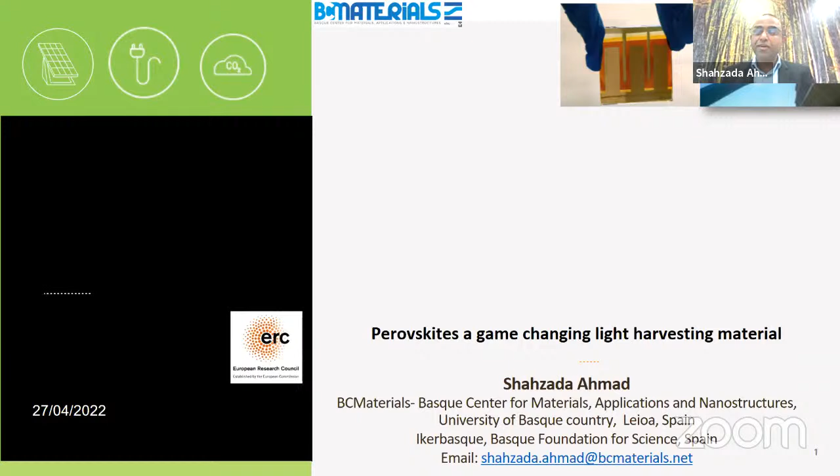Today, for almost the last 2 years, we are going through an unprecedented time. And we don't want to repeat this in terms of the climate crisis. Because if we do not act, there will be another disaster scenario in the coming 5 or 10 years. That's why Europe has targeted to be carbon neutral by 2050. And many new technologies will be entering the market.

And especially in the last 2 months, you know that we have been facing other problems in Europe with the electricity price going up. So we need to be self-dependent and self-reliant for security. So this is the outlook of my talk today. I will give you a flavor of thin film PV, perovskites as a light harvester, and how you place 2D materials inside as an interlayer. And then we talk about selective layers, N-type and P-type selective layers.

And this is not only a technology photovoltaics needs, because we are also educating the young generation, inspiring them to think about it, and we are connecting people. So with this emerging or thin film photovoltaic technology, apart from technology, we are addressing the most pressing challenges like the climate crisis, and we are educating the young generation.

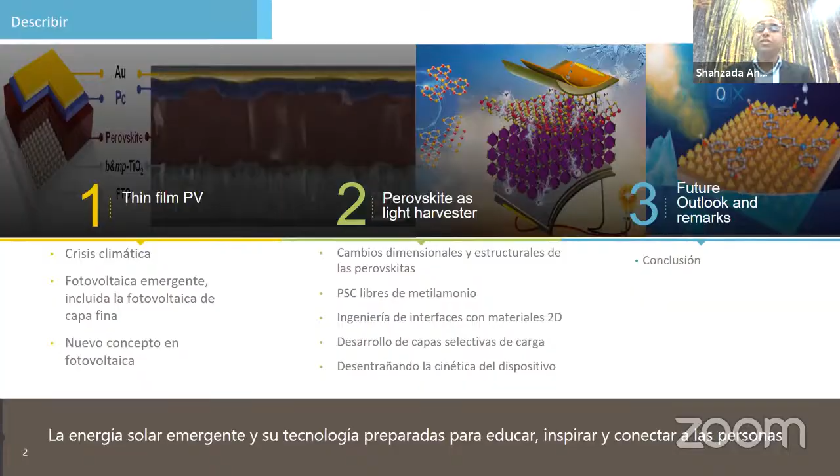Shell, a British company, in 2020 built up a Sky scenario. A Sky scenario because Europe wants to be carbon neutral by 2050, and some countries want to be carbon neutral before then, by 2040. So we need a scenario. We need to set milestones for how we are going to achieve it. In 2015, we signed the Paris Agreement, and we agreed that 2 degrees was too much, so we will cap it at 1.5 degrees centigrade.

And today we are here, 2022. Some cars are running on hydrogen, but by 2035, photovoltaics and wind will be our main source of energy. Almost 1/3 of the electricity will come from wind and solar. And slowly hydrogen will also enter the market. By doing so, Europe will be carbon neutral by 2040 to 2050, and by 2070 almost all of the planet will be carbon neutral.

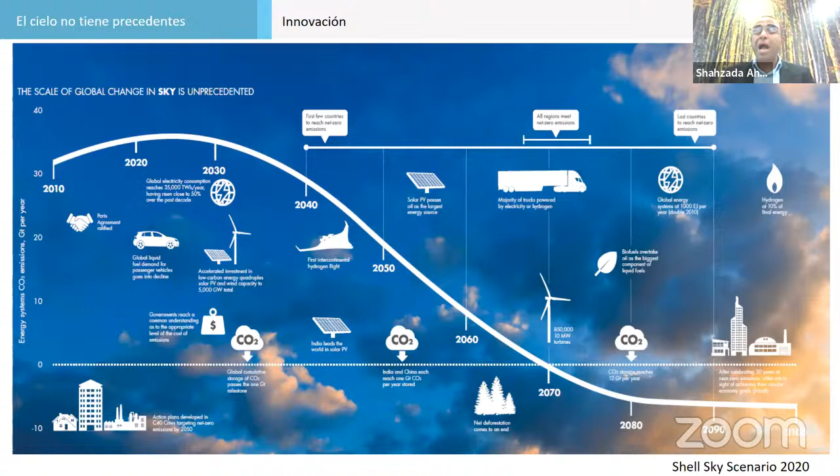And photovoltaics has a huge role to play. By 2050, most things will be done with photovoltaics, and hydrogen will be a new vector for long-haul trucks and buses. We are very happy with the photovoltaic deployment with silicon in the last 10 years, but we believe that is not optimum. We need 1,000 times more photovoltaic deployment to achieve carbon neutrality. So for this, we need new technology, new approaches, a paradigm shift.

As I told you, today solar is almost 3% to 5% here. By 2070, 32%, 1/3 of the electricity, will come from photovoltaics. You can see how this will happen in a gradual manner in this pie chart, for 2025, 2050, 2075 and 2100. So slowly the pie chart will change, and the market share of photovoltaics will increase.

So we are very happy today. The cost of silicon is very low. We are extremely fortunate that new installation of solar energy is now much cheaper than burning fossil fuels, and of course wind in some areas, because this is the best gift to humanity. The sun is always shining somewhere, and wind is also blowing somewhere. We just need an approach and technology to harvest it.

We believe that perovskite solar cells are targeted to capture the thin film market. Silicon is a fantastic product. We don't want to disturb it, let it be, but we want a parallel entry into the thin film market. There is CIGS technology, cadmium telluride, and now emerging solar cells like OPV and perovskites. Perovskite solar cells are the most competitive with cadmium telluride, because cadmium telluride has the lowest LCOE, levelized cost of electricity.

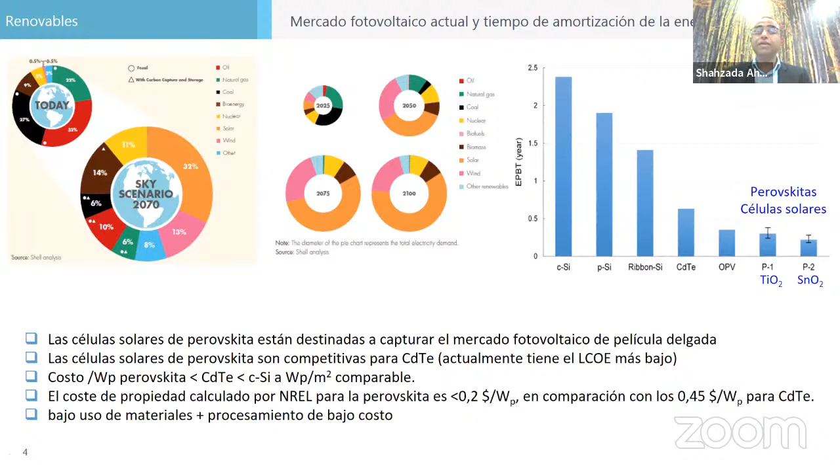And this is, I think, how Europe will generate electricity and how Europe will transmit the electricity. If you look here, by 2022, a very small portion of electricity comes from photovoltaics. And we are fortunate that we are in Spain, where we have plenty of sun, sand, and science. We can do that. And this will gradually increase. In the case of Spain, if you look at the chart, the green area will be rapidly increasing. And that's why by 2050, we will be having energy coming from photovoltaics.

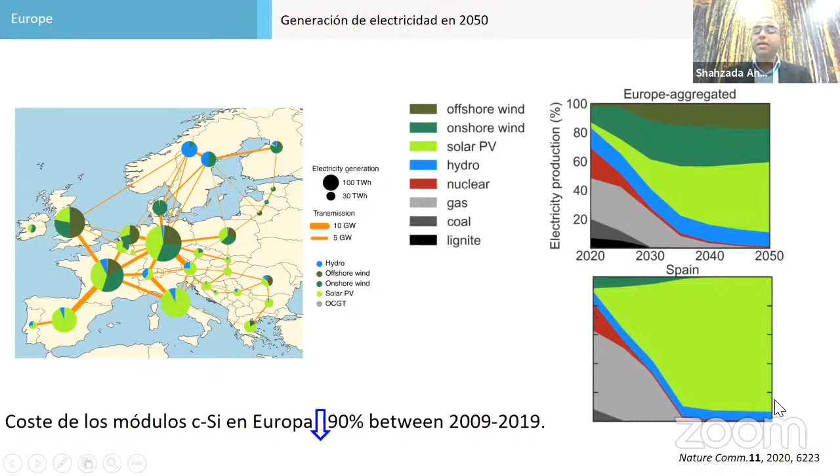In terms of Europe, in Spain you will see most of it is PV. In the UK, it is wind and offshore wind, solar PV and hydro. Here in Germany too, but in Spain and Italy we'll see most of their electricity will come from PV because we are very fortunate to have the sun. And by 2050, in this scenario for Spain, almost 90% of electricity will be coming from PV.

But we need an approach to think about how we can do that. So what is our requirement? Our requirement is there's a growing need for high performance PV. High efficiency, not like 10% and 12%. We need more than 20% to 25%. And low material usage. You should have flexibility, with the added benefit of aesthetics, and the lowest levelized cost of electricity, what you call LCOE, with a life cycle of 25 years of guarantee.

Silicon currently gives you a guarantee of 25 years, but of course the performance decreases 0.7 to 0.8% year by year. And for this, we have to take the risk and we have to bring new technology into the market. What will be our aim? What will be our strategy? We have to think beyond silicon. We have to think also in a holistic manner, because not only photovoltaics in the sun, but all the sensors, because this is the Internet of Things and BIPV.

If we can integrate all the sensors with the photovoltaic unit, because most of these emerging photovoltaics can harvest natural and artificial light. So if they can harvest those, we also have the Internet of Things and BIPV. So we have to make a synergy with these things.

Minimize the supply chain, because now silicon is being manufactured in Asian countries and comes back to Europe. So this is also a big supply chain. It also adds to the cost of manufacturing and the cost of the product. So if we can locally produce them, ideally it should cost less than 20 cents per watt peak for

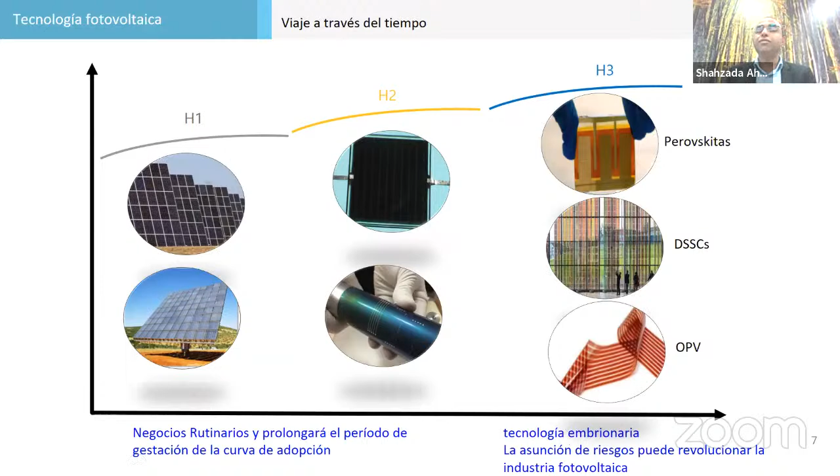Just to give you another roadmap of what is happening today in terms of photovoltaic technology, silicon market penetration has done very well. It is also reaching maturity, but we need more deployment. I don't know how the community will react, because our requirement is 1,000 times more photovoltaics than we currently have. I don't know if silicon is capable of such a supply chain, or if the price will increase.

Then we have advanced silicon. These are already taking market penetration. In thin film, many technologies are ready, but due to the cost, they are not able to reach market maturity. They have penetrated some markets, like CIGS at market entry, but it's not going further into the market.

Cadmium telluride is a very good product. It's also cheap, 22.5% efficiency. But there's only one company, First Solar, which makes it. They have already achieved their target, because First Solar has an exclusive right to buy tellurium, and no other company can do that. So this is already market penetration, and they cannot produce much.

Amorphous silicon gives 10 to 12% efficiency. If we talk about the emerging topics, we have dye-sensitized solar cells. The research has been done for 2-3 decades.

They can also give you a performance of 14% to 13%, but they are very colorful, so you can think about window applications. And then we have perovskites, which give you 25%. This I also put in red because they are not that stable as compared to silicon, etc. And then we also have organic polymers, organic solar cells, which are also very efficient, almost 20% efficiency, and the device thickness will be less than 100 nanometers.

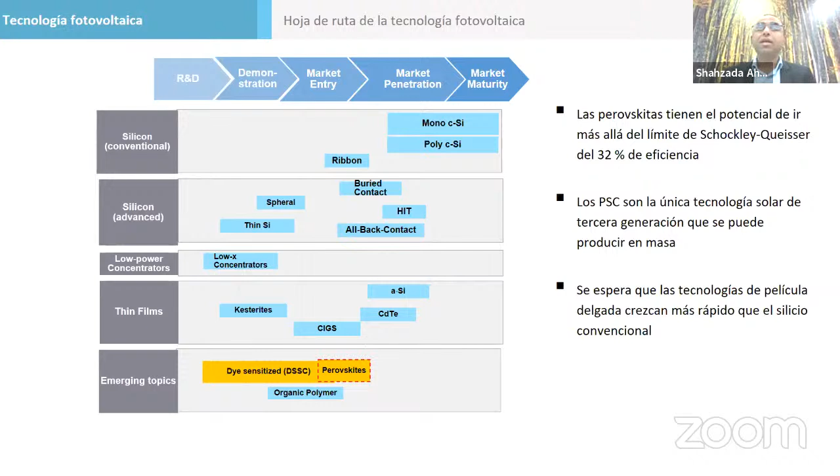So perovskite, I think, is the only thin film technology which can compete with the cost and the efficiency to bring down the LCOE. It is also a thin film technology which has the capability to go beyond the Shockley-Queisser limit. The Shockley-Queisser limit is 32.6%. Currently we have 25%, and a tandem of perovskite of almost 30% has been reported. So we believe in the coming couple of years this performance can be achieved. And this is another thin film technology which can go to mass scale to compete with silicon.

What silicon is today, we are very happy with, but it took six decades, 60 years, to achieve this performance. The first silicon cell was in 1954 at Bell Labs. At that time, it was only 5 to 6% efficient. So a 20 watt module would be like this size. Then by 2020, one module is like 320 watts, 1 meter by 1 meter. It is almost 20 to 25% efficient, and we are already producing more than 600 gigawatts.

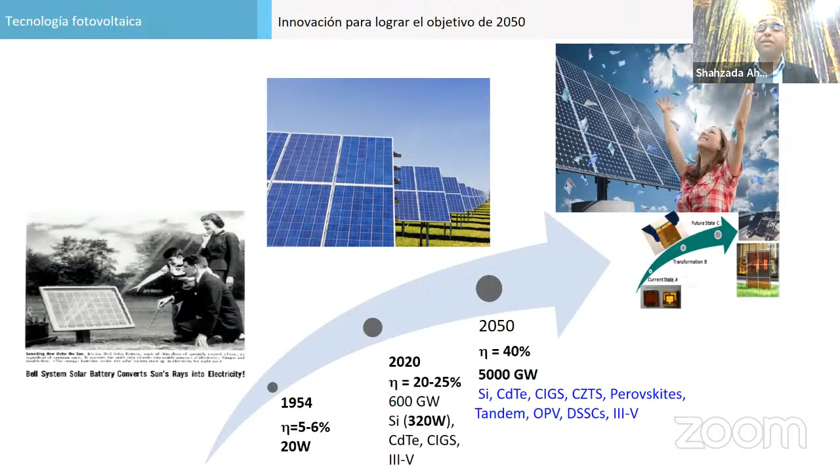And we also have cadmium telluride, CIGS, but these technologies are also waiting at market entry, and it is very difficult to say whether they will achieve full market penetration or not. And by 2050, if all these technologies can bring down the cost, we also need a contribution from silicon, cadmium telluride, CIGS, CZTS, perovskite, tandem perovskite, OPV. So if all these technologies or some of them can compete, then we can achieve 5000 gigawatts of installation, and we can push the performance to 40% efficiency.

So why are we doing it? If I plot some of the thin film technologies here, you will see perovskite has risen like a rocket, as you can see in the red colors here. In 2012, it was 3.8%, because we learned from liquid-state dye-sensitized solar cells, and then we replaced the liquid with a solid. From a mere 10%, it achieved 25.5% efficiency. Organic solar cells have also shown great performance in the last couple of years. Now almost 19% to 20% efficiency is being measured.

Amorphous silicon is flat at 14%. And if you look at other technologies, DSSC has also not shown much improvement in the last 10 years. If you look at silicon, there is no improvement in terms of efficiency. The cost has gone down, but on the efficiency chart it is relatively small. The yellow-orange color is CZTS, at 12.6%. So for perovskite, what we have is low cost, high efficiency. The missing link is stability, because we are not 25 years stable compared to silicon or other thin film technologies. So what is missing is stability, to finish the golden triangle.

Also, we have some problems inside the perovskite: phase transformation, halide segregation. We were very happy we took mixed halide, giving very high performance, but mixed halide also has a problem with phase segregation. Ion migration, crystal size expansion, because under a stress condition or light, the crystal expands and contracts. And if you take a mixed halide, then you have high band gap and low band gap dominant regions.

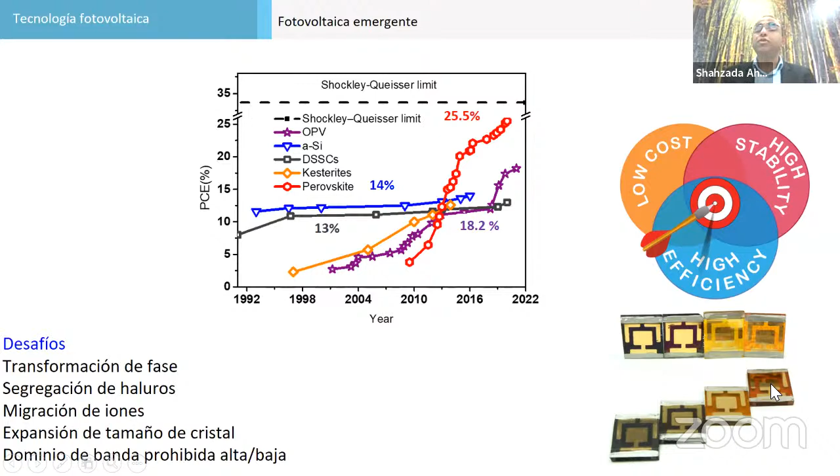Pure methylammonium lead iodide is a dark color, but if you mix iodide with bromide, it becomes yellow and orange. These orange colors are also good for BIPV applications. You can put them on your window applications, etc., because they are very semi-transparent. They give you efficiency of 10 to 12%.

You don't need a very high energy extensive process to do that. You can just spin coat them and bake them. But also the defect tolerance is high, and the losses are very low. So gallium arsenide is a very good semiconductor. The band gap is 1.43. The loss is 0.3 electron volt. Okay, 0.3 volt, 300 millivolt.

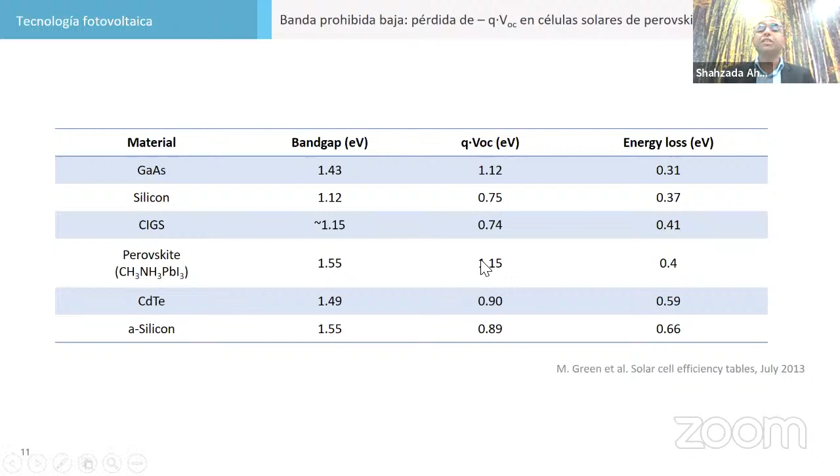Similarly, silicon also has 300 millivolt. And in the same line is perovskite. It also shows 350 millivolt losses here. In terms of cadmium telluride it is very high. CZTS is very high because with CZTS the voltage is only 600 millivolts, 580 millivolts you can achieve. The losses are very high. So all these things make the energy loss very high. So this is the band gap, this is the VOC you can achieve, even higher VOC has been achieved. So losses are very low, and due to low losses, you can make high-performance

devices. As I said, the perovskite is a light harvester material with a thickness of almost 400 to 600 nanometers, sandwiched between two types of charge selective contacts, N type and P type. And then we finish the device with a metallic contact, which is gold or silver or any metallic contact. The perovskite absorbs light and generates electron and hole pairs. The electron and hole pairs then travel to their respective electrodes.

And to harvest the light effectively, we put an additional hole transport layer here. On the bottom, we put electron transport layers. And this is the cross-section diagram of a device. This is the cartoon. You can see the same process mimicked here. The hole will go to the charge selective side. The electron will go to the bottom electrode.

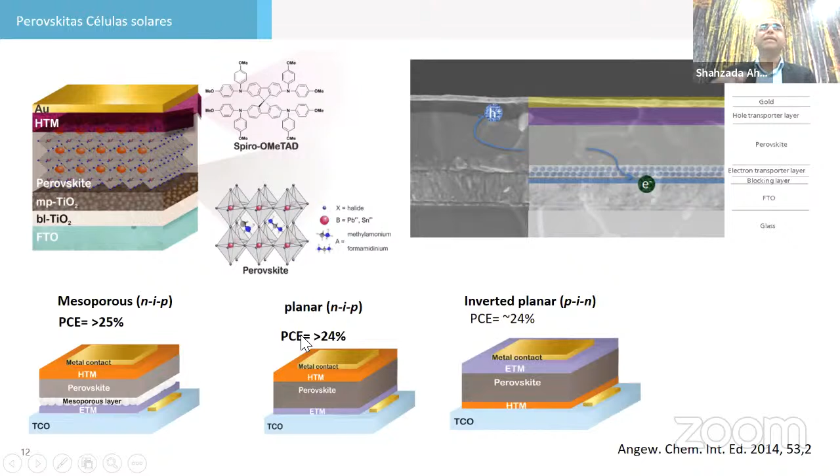So you can also make different types of device architecture. I don't want to go into that one, like NIP, planar. You can even get rid of mesoporous TiO2. You can take planar SnO2, right? And there are also inverted devices we call PIN. So you start with deposition of a P layer, then you deposit the perovskite layer, and then finish the device with an electron transport N type layer. And this is good, you can do that.

Another thing is that perovskite is very good at absorbing in the visible part of the spectrum. And silicon absorbs in the NIR region. So it also gives us an opportunity to make tandem devices. And tandem devices, which I just commented about, have shown almost 30% power conversion efficiency. So much higher than silicon. Silicon is 26.5 now. So the tandem devices have shown very high efficiency.

So here you see the wavelength; we absorb very well in the UV-visible up to 800 nanometers. From 800 to 1200 or more, the silicon solar cell, the bottom cell, can absorb. So if you shine light, the perovskite solar cell can be the top cell, it absorbs the light. The bottom can be the silicon cell, and by doing so, you can see our voltage increases, the current is also here, and then we have almost 30% efficiency. People have reported it. Top cell and bottom cell.

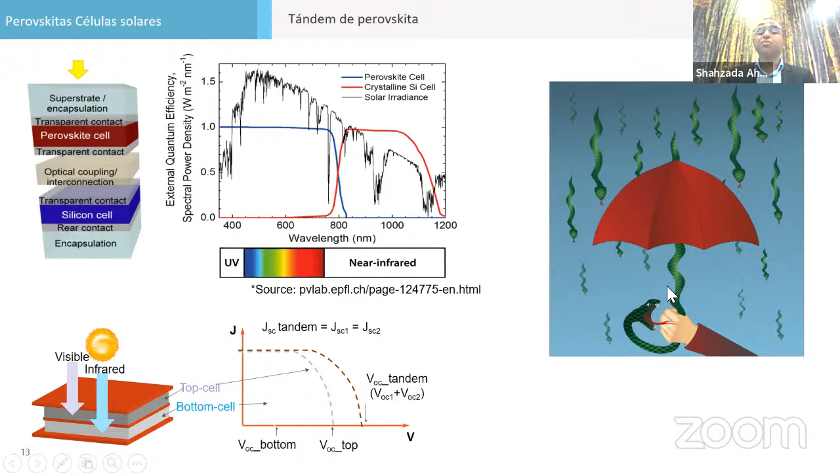It's called the tandem approach. But I will wait for some time. It's a double-edged sword because silicon is 25 years stable, and perovskite is not that stable. So I will wait a little bit for this tandem technology. Rather, I will say perovskite-perovskite tandem can also be a good approach because recently I think 26.5% has been demonstrated with perovskite tandem.

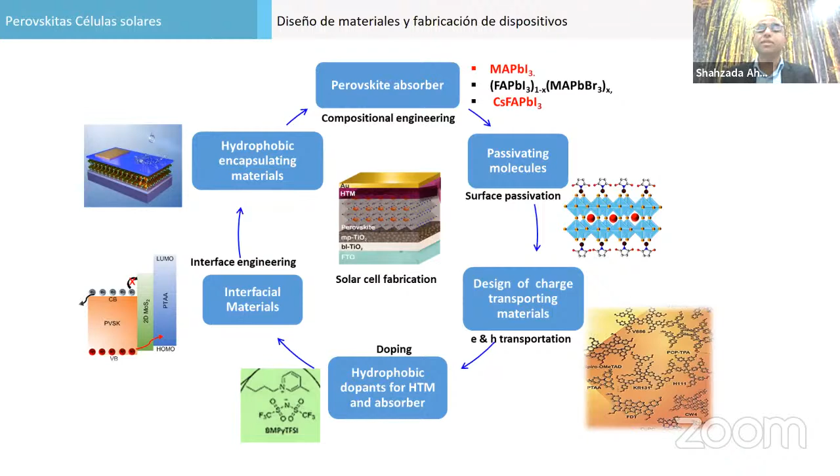What my lab is doing, we work on the full value chain in a holistic manner. We develop different types of compositional engineering of perovskite, and the perovskite crystals are very large, and sometimes they have defects. They're very polar, so we passivate them with molecules to create a very good interface. We develop different P type and N type, what we call electron and hole transport materials. We develop different doping strategies, interfacial materials, hydrophobic doping. All these things allow us to improve the reliability, performance, as well as stability of the perovskite solar cell. And we have been working in different directions on this.

What my lab is doing, and why most people are interested, is solution processing so that the cost can be low. But there's another school of thought, and it's also very good.

We can evaporate the perovskite. We can sublime it. You can evaporate the perovskite, and this is also very good because if you evaporate the perovskite, you can exactly control the thickness. The device reproducibility will be very, very high. In wet chemistry techniques, we cannot exactly control the thickness to 2 nanometer resolution.

So what we do is solution process: one-step deposition, two-step, or different types of solvent engineering approaches, or slot die coating, doctor blade coating. But there's also a good approach of doing it with thermal evaporation. You can do sequential deposition or single-source deposition here.

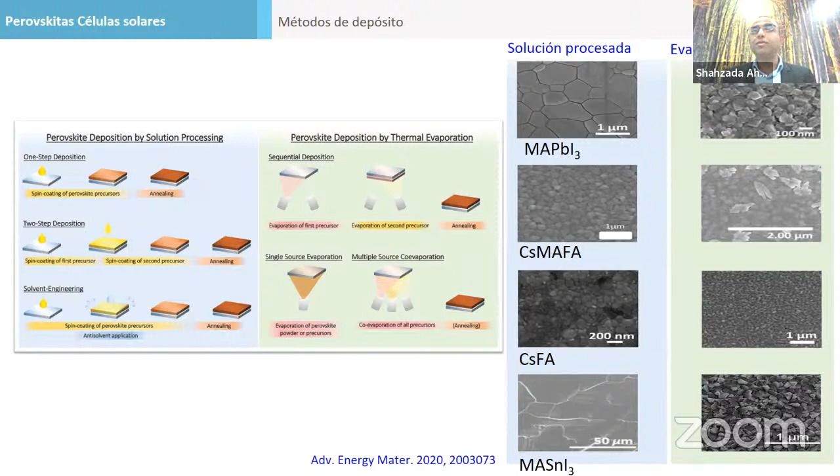And if you do evaporation of the perovskite, I think the perovskite grains are even smaller than that one, much smaller. With much smaller grains, the VOC losses will be higher.

When we started to work in 2012 with the perovskite, our grain size was very small because at that time we were working with only methylammonium lead triiodide. But after working for almost 10 years, we have used different kinds of composition engineering and solvent engineering approaches to make our crystals larger. Now we have even larger crystals, more than 1 micron in size.

And why do we do it? Because methylammonium lead iodide absorbs till 780, and this is a band gap of 1.54 electron volt. But if you take formamidinium, it absorbs till 820 or 800. So if we can shift the absorption onset to a higher wavelength, we can absorb more light. If we can absorb more light, we can generate more current.

Similarly, if you replace some iodide with bromide, the band gap will increase. If the band gap increases, we will have a higher VOC. So by playing with all these things, people came up with different types of strategies. And with the mixed perovskite, people were very happy that we have a higher performance.

But now the community, after working, realized that this is very good, but it's also a double-edged sword, because after some time there is phase separation, because we are mixing two halides. The halides get separated, and the device performance is lower. It's just symbolic here how from methylammonium to mixed perovskite the performance increases.

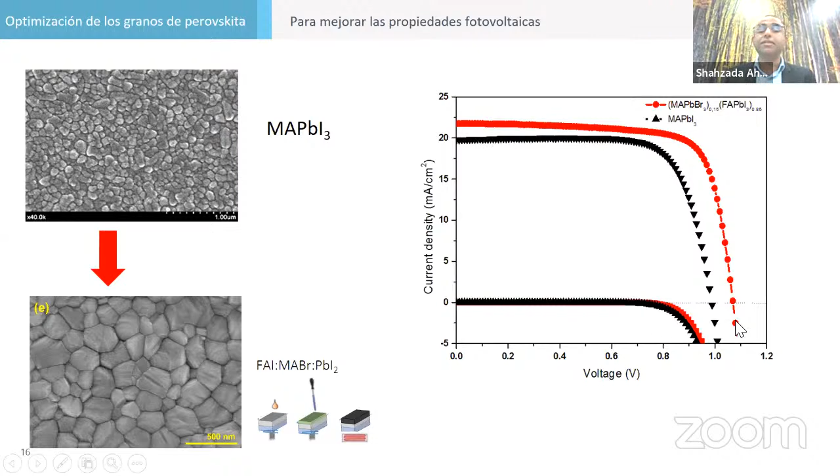In photovoltaics, there are some phenomena and kinetics. Some are desirable, some are undesirable processes. Desirable processes are good; you want to push them. Undesirable processes we have to minimize to minimize our losses. What we want is separation of charges and extraction of charges. What we don't want is recombination.

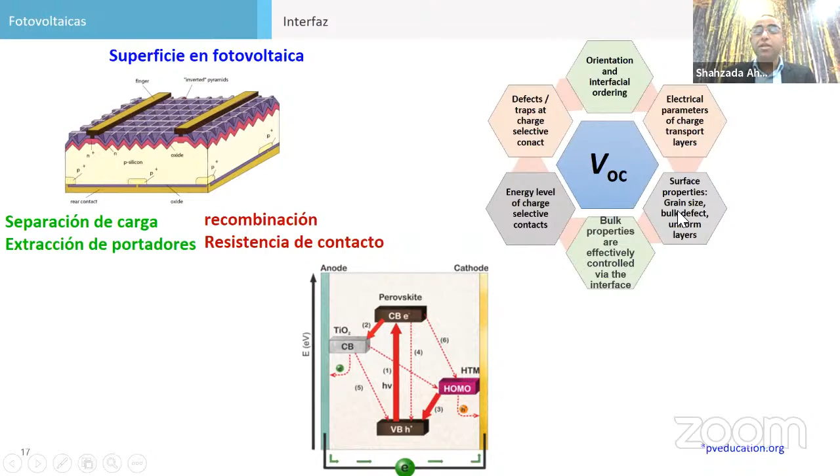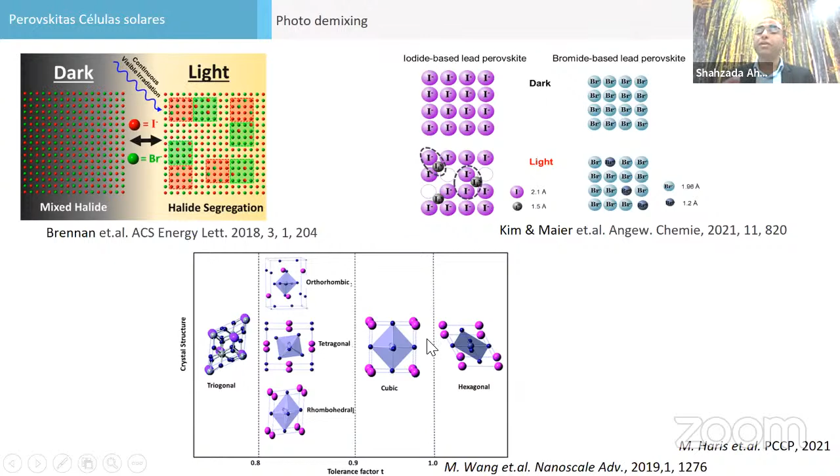There's another factor for the perovskite, the tolerance factor, for how to increase the stability. We found for tetragonal, trigonal, cubic, if the tolerance factor of the perovskite is close to 1, then higher stability can be achieved. So methylammonium is not good, but formamidinium has a tolerance factor close to 1. That's why it's more stable. I will show you some examples of formamidinium, delta FAPbI3.

We are working on a powder processing method. It's a pre-synthesized powder, so this is fully solution based. You just put any solvent in it. It is like a semiconductor ink, and you can deposit it. So we have developed this pre-synthesized perovskite powder, delta FAPI. And when you heat it, it becomes alpha FAPbI3. We measured the performance of the devices at close to 16% to 18%.

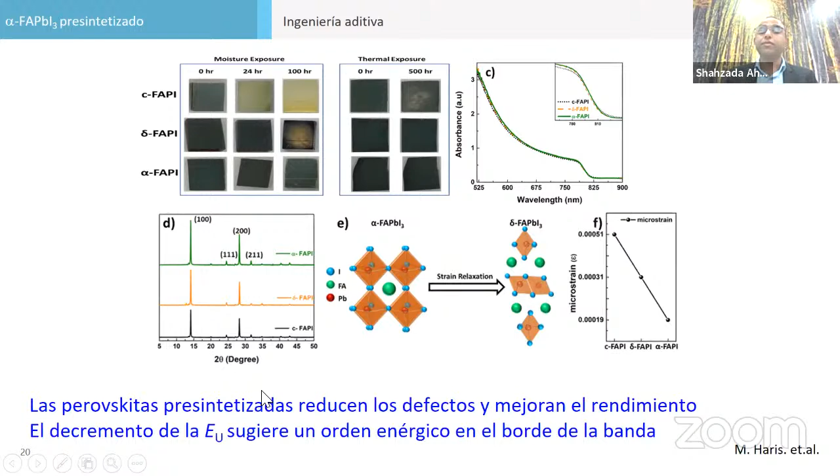Then we also applied additive engineering, meaning ionic liquids which are very hydrophobic, or fluorinated molecules. We put some highly fluorinated molecules in it. We can see the ordering of the crystal is more perfect here. This also pushed our performance, and we have also measured very good stability with this additive engineering.

And most of the people now realize that MAPbI3, the first we have been working on, is not stable enough because it changes phase from one phase to another at 80 degrees centigrade. And FA is more stable. So now in the community there is a big push to FAPbI3, because its tolerance factor is also high.

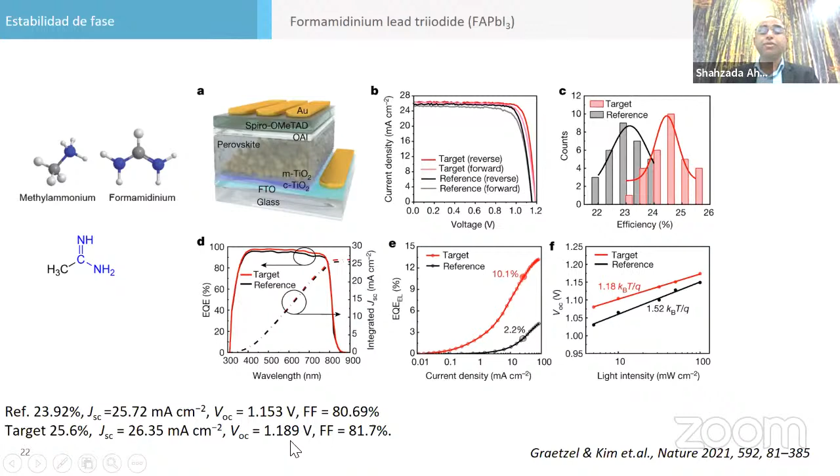The reference was almost 24%, but by doing this passivation of FAPbI3, 25.6% has been reported last year in a Nature article. The VOC is also 1.18 or 1.19. So these are very good approaches to increase the performance, high performance cells.

So you can have a mixture of lead and tin. Tin as such is not possible because tin 2+ oxidizes very fast to tin 4+. So if you make a mixture of lead and tin, this is also very good, and it has a band gap very close to 1.2 electron volt, which you can achieve with 50-50 lead and tin with formamidinium and methylammonium. These people have achieved an efficiency of 22.23% by doing so.

But what they did is, because the band gap was very low, 1.1 or 1.2 is very good for a tandem approach. So you can have a perovskite tandem. With another perovskite which has a high band gap, like methylammonium bromide based, they found a new composition which has a band gap of 1.8 electron volt.

So they put the narrow band gap lead and tin perovskite at the bottom, and the wide band gap perovskite of 1.8 electron volt at the top. And they have recently achieved 26.7%, 26.8% efficiency with a perovskite tandem. So this is also a very good approach to increase the performance of the solar cells.

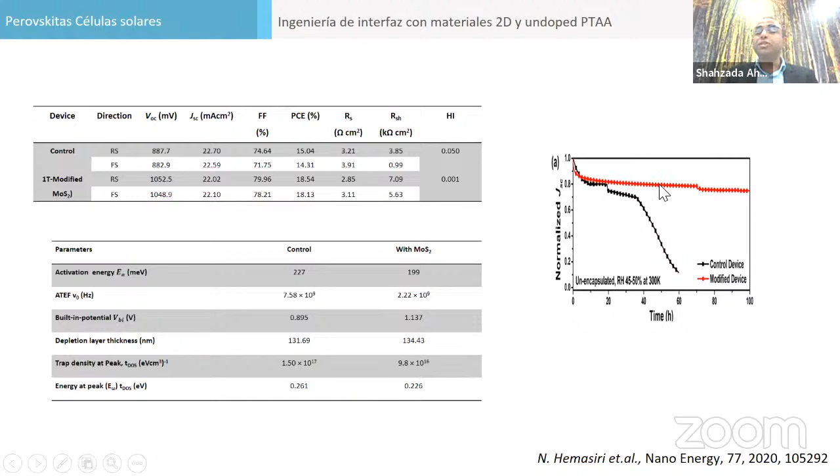So without MoS2, the devices give 15%, and with MoS2, we can go to 18% efficiency. We characterized some electrical parameters to see why it happens. We found the built-in potential was higher, the defects were lower, and the trap density was lower, and that's why the device improved. But the good thing is that you can see the device stability was much higher than that one.

Similarly, we introduced another 2D material like WS2 here. There's a cover of the journal here: a very thin layer of WS2 as the interfacial layer with the perovskite also increases the voltage of the devices and the performance here. It also aligns the energy level of the devices.

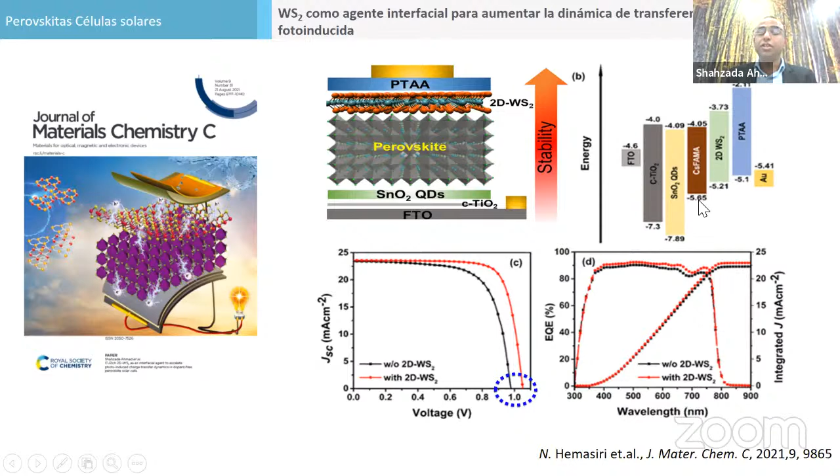As I explained before, we did a lot of electrical characterization to understand why it happened. So the built-in potential is higher, and we also found that the photocurrent saturation is achieved at very low voltage by placing this 2D material, and the device is also more stable here.

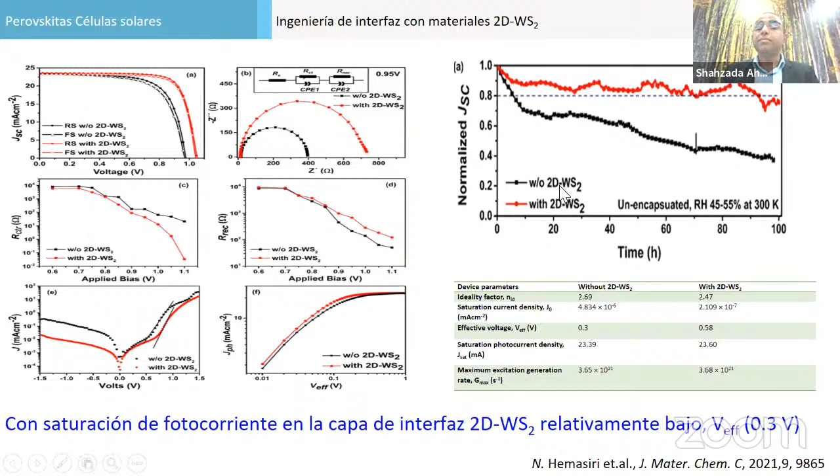Recently, we have been working on these inert 2D materials because they have no functional group. Now we are working on functional 2D materials like carbon nitride. So here we have an amine group, and this amine group will also passivate the perovskite, with this carbon nitride as an interlayer here.

So two types of carbon nitrides, both are C3N4 but from different synthesis processes, solid state and liquid state, and both have a different color, so there's a different band gap, and we found one of them is good here, which improves the performance and stability, and we achieved almost 20% efficiency with this one.

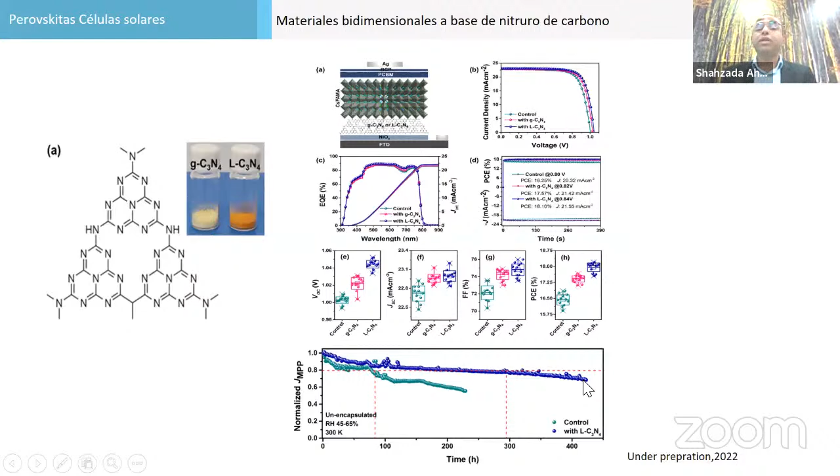And the good thing is that over 400 hours of maximum power point tracking, the device is losing some performance, but they are unencapsulated devices. If you encapsulate them, they will show even higher performance and higher stability.

And BIPV as a semi-transparent solar cell is also very important. If you decrease the thickness of the perovskite to 100 nanometers instead of going for high efficiency, and put some polymer matrix to bind it, we have achieved almost transparent perovskite solar cells, and they show an efficiency of 11% to 12%.

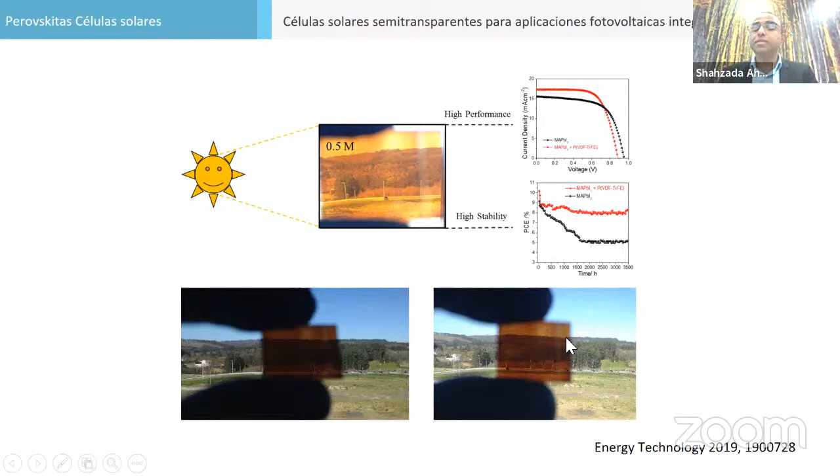As I said, there's the perovskite, and then we have different types of material, N-type and P-type. N-type is more subtle, but P-type plays a more active role. P-type is the material we put to extract the charge efficiently. Generally, we take Spiro, but Spiro we buy from markets is very costly, and also it's not UV stable. So in the long term, nickel oxide, graphene oxide, copper iodide, or small molecules like PTAA, P3HT, and other organic materials need to be developed, which are more stable.

There are some requirements: the energy level should match the energy level of the perovskite band alignment. There should be high mobility, and there should be no phase transition, because if there is a phase transition at less than 100 degrees centigrade, the solar cell will not perform very well at high humidity and temperature, and it should be dissolved in an orthogonal solvent.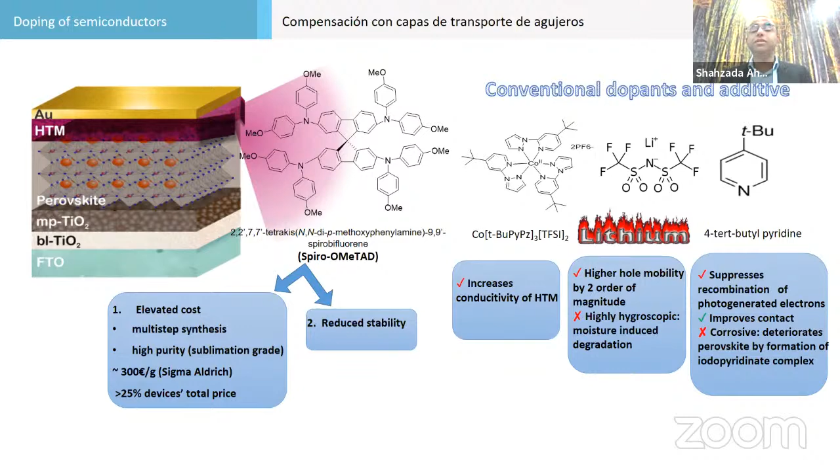As I told, there's the high cost of Spiro, it has reduced stability, and also Spiro needs doping for oxidation; it needs lithium salt doping. Lithium salt is highly hygroscopic. We need TBP too, so all these things increase the recombination, etc. So we are trying to get rid of all these dopants and develop new HTMs which are dopant free, so that we will not compromise on long-term stability. And we have been successful in doing so.

This is just one example of pyridine-bridged diphenylamine carbazole. Carbazole is a very good organic semiconductor material with mobility. And the pyridine will passivate the perovskite surface. With only pyridine, the thin films were not uniform. When you put carbazole, the electrical properties improve, and the uniformity of the deposited film also increases.

And the performance was close to Spiro, but Spiro was 400 euro per gram, while this material is less than 30 euro per gram. We have calculated it, and there's no hysteresis, and stability also.

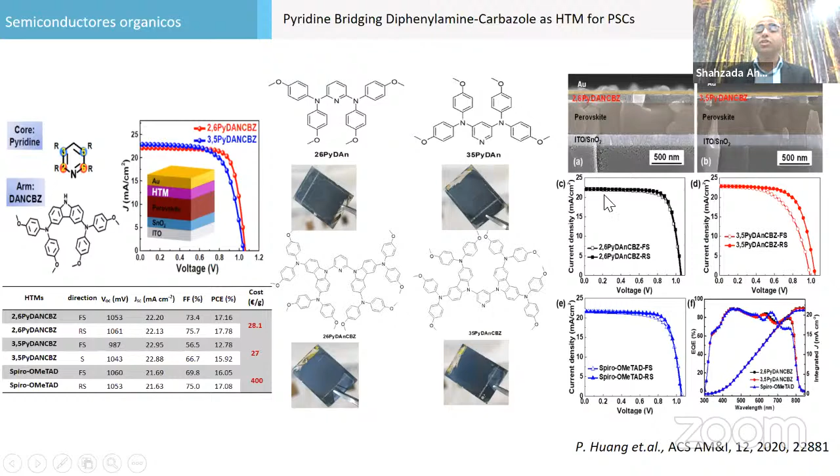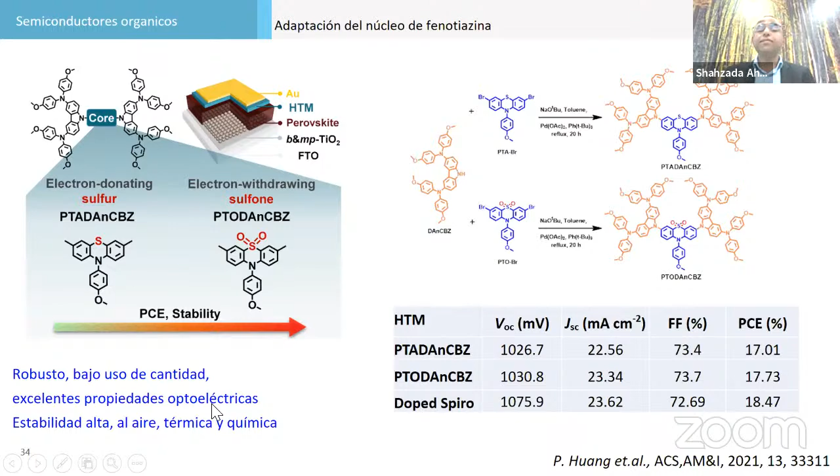Similarly, we took another, a phenothiazine core. Phenothiazine core is a very low-cost core, but it's more robust. It's a very simple process. We use a one-step process to synthesize this phenothiazine core. It was more air and thermally stable. It's robust and has very good optoelectrical properties. This is the phenothiazine core. So we use different types of organic semiconductors to increase it.

Then, recently we have been working on a fluorinated HTM, because fluorine is Teflon, which you use in your kitchen utensils. It repels water, it repels oil. So similarly, we use fluorinated HTM, organic molecular HTM. They also work very well to boost the stability of this material.

This is the PL quenching. The fluorinated one quenches the perovskite very well. We used two of them. Without fluorine, they form big crystals, and there was no uniform deposition. But with fluorine, there's a uniform deposition. It forms a very good uniform layer. And in the dopant-free state, without any doping, it shows very good performance. And this way, stability was improved.

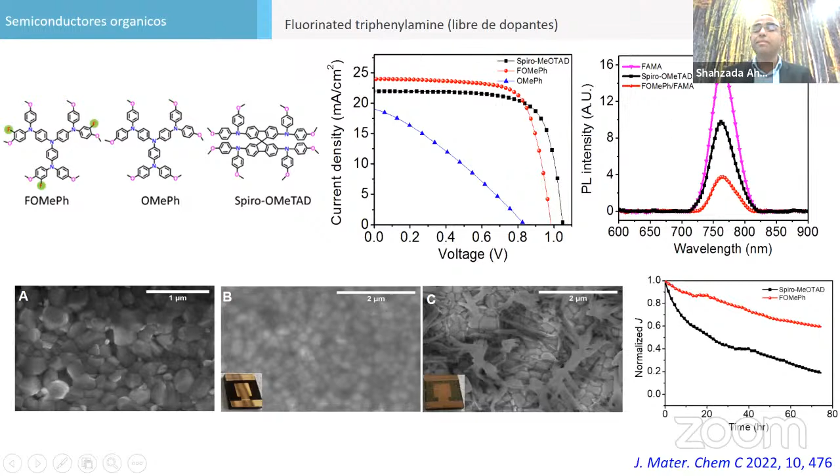So we published it. We also played with nickel oxide, the inorganic HTM, to increase the stability. This is the nickel oxide as such. We put a very thin layer of organic semiconductor here. It fills all this to form a uniform thin film of nickel oxide. And it gives very good performance and very good stability with nickel oxide and organic HTMs. So it's a bilayer HTM, a very thin layer of organic and 50 nanometers of nickel oxide.

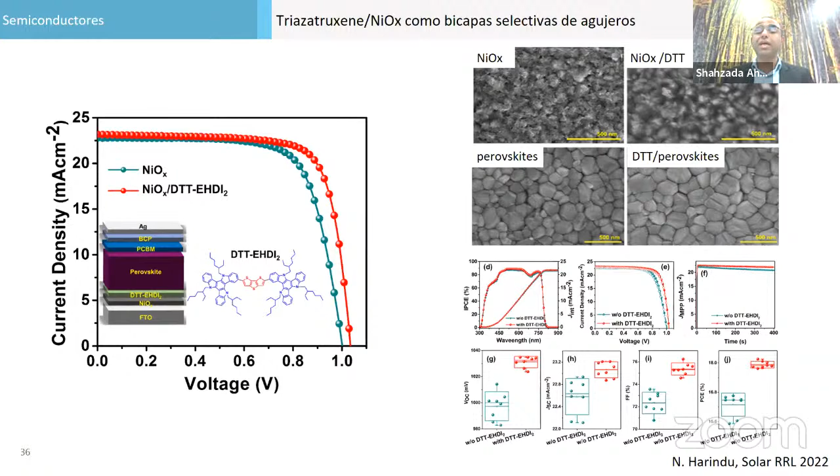And you can see the perovskite crystals are larger, because you grow the perovskite crystals on your HTM in the case of the PIN structure. So the perovskite grains deposit on that one. So the device also showed very good reproducibility.